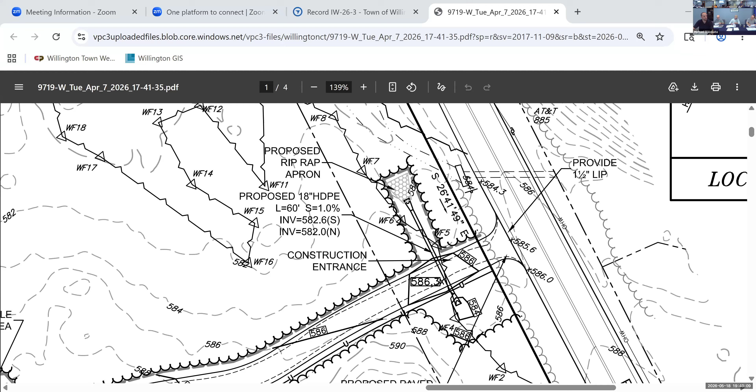Anyway, so Eric's here, he can explain to you. We have the plans up. I was there and Evan as well, so I have a good idea what's going on here. I was out there this morning. Well, I drove almost all the way back. Get the back all the way up? What's that? Get the back all the way up? No. Okay, good. Right, so it's okay, it's fine.

So I was retained by Ryan White because he wants to build a house on this 58-acre parcel. He wants the house set back from the road so he has privacy. This property is abutted to the east by Ruby Road and to the west by I-84. And it's a little bit south of the town bus parking lot, which is across the street on Ruby Road.

The wetlands were delineated by Rick Zulik, certified soil scientist, last September. We're proposing to access the new house. On the plan, the house is all the way on the left, the west side, with an 800-foot long driveway to get from Ruby Road up to the new house site. Right in front of the house is the proposed septic system, and the well is a little bit to the south of the house.

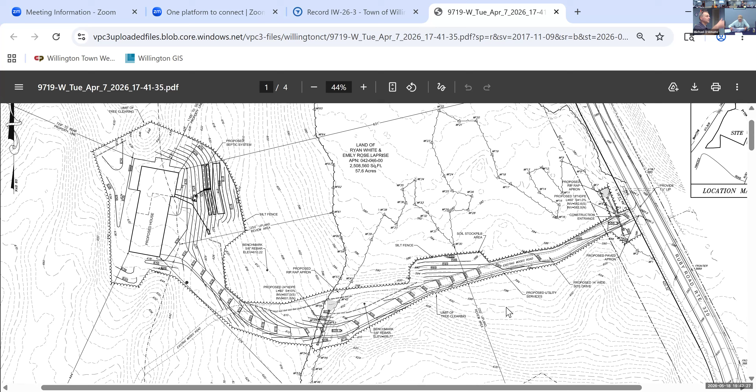There's an existing woods road that you must have driven up. Yes, that goes up almost to the house site and beyond, all the way to the back of the property. But we're going to follow that woods road for about 350 feet before we veer off to the south and then back up to the house site. The reason for that is we need to get this driveway higher sooner, or else it'll be too steep to meet town standards for a driveway. The proposed driveway is not to be paved, so it's got to be under 10%. So by swinging the driveway to the south at about the 350-foot mark, and crossing the wetland where we're showing it, we're getting the driveway up while keeping it under 10%.

And what we're doing is reducing the amount of fill that's needed by essentially climbing the hill sooner. So we're proposing 2 crossings. Mike's got us zoomed into the second one, so I'll just talk about that one first.

We're proposing to cross that with a 24-inch plastic culvert. That wetland is an intermittent water course that was delineated by Mr. Zulik. The crossing is about 55 feet south of where the Woods Road crosses the wetland, even though you can hardly tell it's there when it's dry out.

What I really like about this location is when we put this pipe in, it's going to discharge onto a riprap level spreader at a location that's relatively flat compared to the rest of the water course. So we're going to be reducing velocities coming out of that pipe, and therefore reducing any likelihood of scour and erosion downhill of that. I think it's a really good location for that crossing.

As far as the other crossing goes, it's right off Ruby Road. There's a wet area there that Rick Zulik estimated was created by excavation, a very historic excavation, maybe when they widened the road or something. He noted some springs and seeps in that area, so it is wet at times. We're crossing that wetland with an 18-inch plastic culvert as well, similar with the stone riprap at the end, to reduce velocities coming out of that pipe.

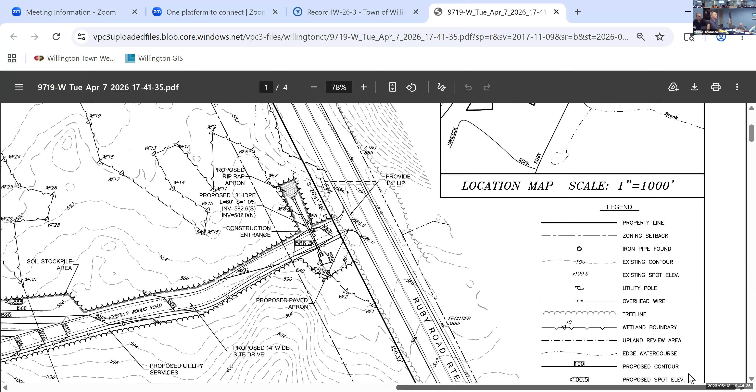Other activities within the upland review areas are the installation of underground utilities, which are just parallel to the driveway. In this case, the upland review area is 250 feet based on the existing ground slope, so the septic system is within the upland review area and a small portion of the house. You can see on the map, the septic system is probably 200 feet away from the wetlands, and the house is probably about 230 or 220 feet away. So pretty good distance there.

We're running erosion sediment control barriers, silt fence, down gradient of all of our construction activities. We have designated stockpile areas shown on the plans and an anti-tracking pad at the curb cut, and seeding schedules to stabilize the site once construction is done.

Lastly, I just want to mention that in Mr. Zulik's report, he concludes that the 2 crossings are the best option to access the house site. The plan includes the proper erosion and sediment controls, and he does not foresee any long-term or short-term negative impacts to the wetlands at all. So with that, I'll just answer any questions you guys have.

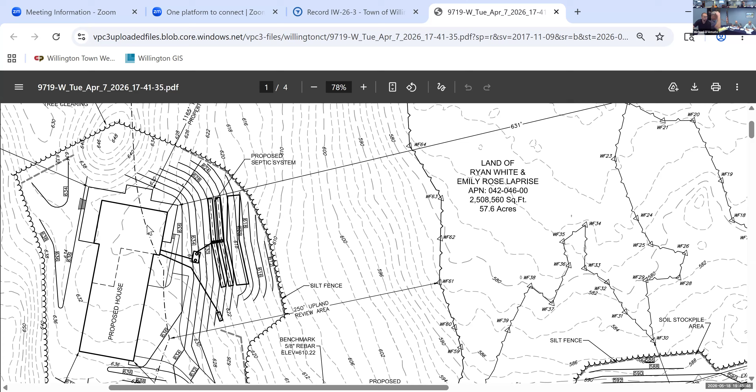The soil stockpile area, especially here, what's going to happen to that soil? Is it going to get reworked into that grade, or?

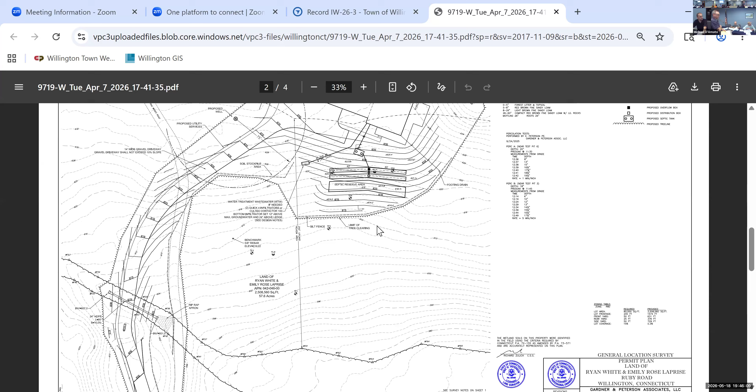So we're bringing in fill for that area right there that you were pointing at. Yeah, stockpile area, probably shown on sheet 2. Nonetheless, we could be stockpiling topsoil there and then leaving it until we need it again, or seeding it. But most likely, when we bring in fill for that portion of the site, we'll stockpile it right there, make sure it's uphill of the erosion sediment control barriers, and use it as we need it.

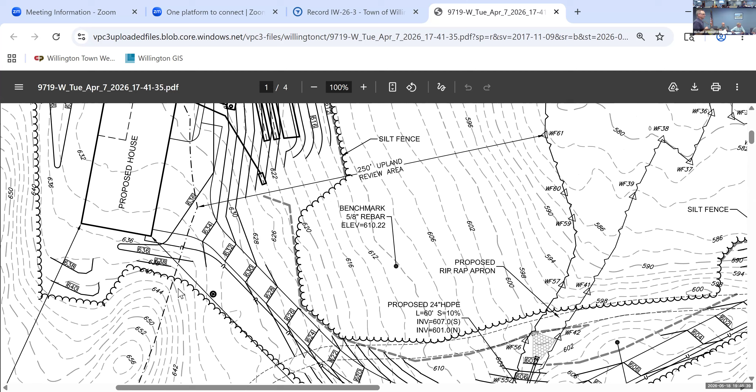And then there's another one on the other side of the crossing too, kind of the same elevation of the septic system. Right, yep, right in that 626 area. So they'll strip the topsoil for the septic and bring in sand and whatnot for that.

Yeah, I was just, cause that's so close, that first one we were looking at, I mean, it's right to the tongue of that wetland there. So, I see what you're saying. Yeah, so maybe in that area.

I know you're gonna have silt fence, but maybe just bump up your BMPs a little bit, maybe some wattle or hay bales. We could even slide it a little bit to the east instead of having it right there, where it's nice and flat. That might be a better option.

And then you're further away from that point on the wetland flag 30 there. Yeah, sure. You can put that in as a condition.

I have a question to ask. How familiar are you with the drainage of 320 south of this site, particularly on this curve here?

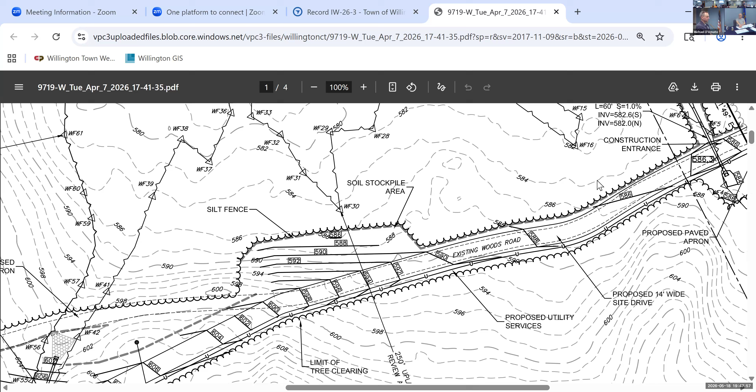The DOT pushes a lot of stormwater off the road at the toe of slope, and it's going to travel down and cross that driveway. I'm questioning whether or not using an 18-inch pipe is going to be adequate in extreme situations.

So in looking at the topography out there along Ruby Road and onto our site, I remember figuring out the watershed to that culvert. And I was actually a little surprised how at times the water does get onto Ruby Road and then gets back off and onto our site, just like you're talking about. So we designed that culvert for a 25-year storm to get water, which includes portions of Ruby Road, over to there, and obviously the forested area on our site and a little bit to the south of it.

So is this area here, Eric, in your watershed? Yep, absolutely. Yeah, I mean it comes out like this. All this is in the watershed.

Yeah, because they've had a continual problem down through here, the erosion along. It certainly seems like the water does run right down that edge of that road. Yeah, but it also gets diverted onto the property, and where it goes from there, it's not going down the side of the road. There is some that goes down the side, but a lot of it's gonna cross the driveway. We have accounted for that. That was one of my concerns. It was a little surprising to me that was gonna be the case, but yeah.

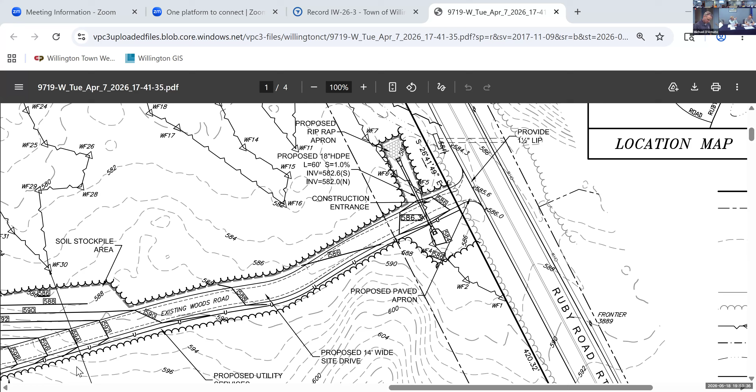All right, so I'll make a motion to accept, approve inland wetlands application IW 26-3, request to construct driveway, utilities and culverts associated with construction of a single family home at 0 Ruby Road, map block lot 42, 4600, owner R. White, applicant E. Peterson, with the condition that they're gonna move that eastern stockpile further to the east.

Between those two wetlands, be further from wetland flag 30. Yeah, between 30 and 16. Gotcha, 16. Yeah, right, like that, so just move it to the east.

Anything else, Sean? Are you okay with that? Yes.

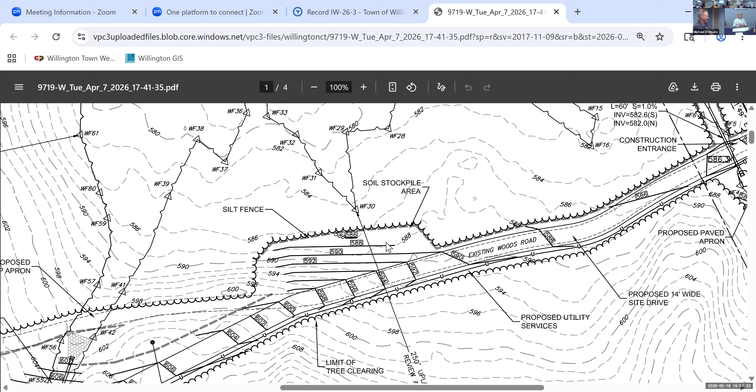Oh, I'm sorry, you guys vote? Good luck. Oh, did we vote? I made a motion. Did I miss it? Yeah, he's got a second. All in favor? Aye. Any further discussion? Okay, thanks a lot. Thank you.

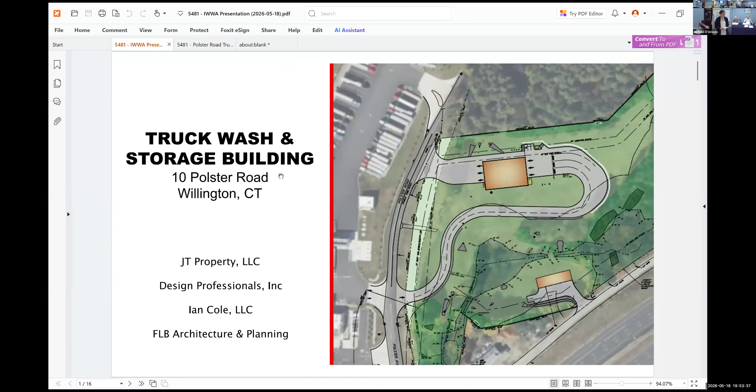For the record, my name is Lauren Mello, I'm a professional engineer in the state of Connecticut with Design Professionals, Inc. With me tonight is Casey Cousins, EIT and DPI's project engineer, and Ian Cole, registered wetland scientist and professional soil scientist in the state of Connecticut with Ian Cole LLC.

We are pleased to present this application for your consideration. We are here representing JT Property LLC, and this project requires IWWA approval because portions of the work are located within the 100-foot regulated upland review area of the wetlands.

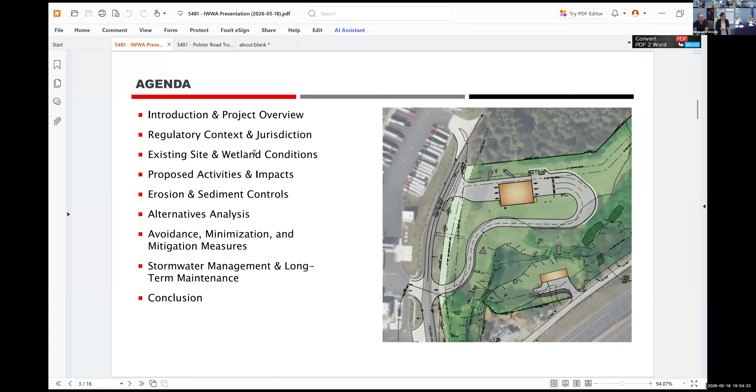The town of Willington regulates inland wetlands and watercourses under their own regulations, adopted and effective September 2009. These local regulations implement the Connecticut Inland Wetlands and Watercourses Act, found in Connecticut General Statutes sections 22A, 36 through 45. We have prepared this application in full compliance with the town's submission requirements.

The package includes a complete set of site and erosion and sediment control plans prepared by DPI and wetland delineation reports prepared by Ian Cole as required by the regulations. The project also conforms to the town of Willington's planning and zoning requirements, the Connecticut DEEP Soil Erosion Sediment Control Guidelines, and the 2024 Connecticut Stormwater Quality Design Manual.

On May 11th, we received technical comments from Nathan L. Jacobson and Associates, the town's engineering consultant. The comments primarily focus on the stormwater management system and required some clarifications and minor adjustments. There were also a few site-specific comments regarding vehicular maneuvering, safety, and signage on site.

We submitted a formal response to comments letter on May 13th that directly addresses or clarifies each item. While we defended certain aspects of the stormwater design that were intentionally configured, we have committed to incorporating the majority of Jacobson's recommendations into the final plans.

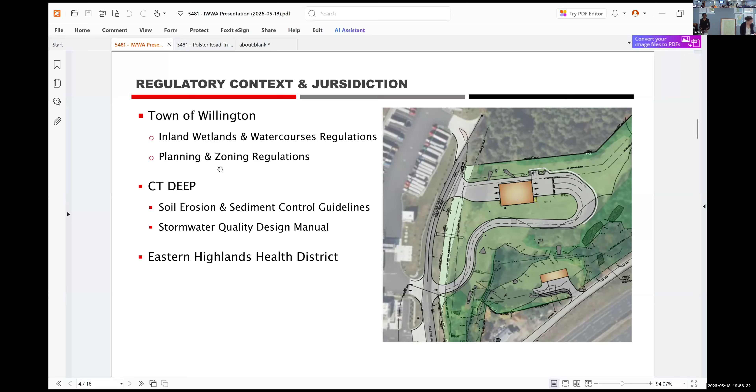The subject property is a 12.3 acre lot. It's currently a vacant and undeveloped parcel located within the designated commercial zone. Just to note, the site received a zone change approval from Planning and Zoning on December 2nd, 2025.

The site is accessed from Polster Road on the western boundary and Mahaliak on the southern boundary. The site was formerly farmland and currently features large boulder piles, a gravel drive, several stone walls, and 2 man-made ponds. When we were out on the site, walking with Commissioner Toulis last Monday.

The property consists of 2 main open fields, a larger one to the north, approximately 5 acres, and a smaller one to the south that's approximately 1 acre. They're both predominantly covered by dense upland grass and connected by a narrow grass strip between the 2 wetland areas.

The edges of the clearings transition into wooded areas that extend to the property lines. So on the screen, all that green hashed area, that's all wetlands on site.

Overall, the property drains from the northeast to the southwest corner. It is located in the Roaring Brook Subregional Drainage Basin, and a narrow farm drainage way runs between the 2 fields and connects the 2 man-made ponds. That's this line right here.

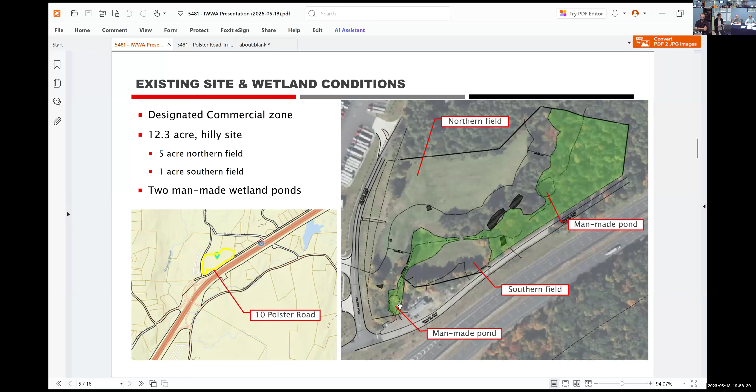Good evening, for the record, my name is Ian Cole, professional soil scientist, professional wetland scientist, based out of Middletown, Connecticut. I delineated the wetlands on this site in December 2024, about a year and a half ago now.

Then I followed up once the project had a design done. I went back out this spring to rewalk the site and do basically a wetland function and value assessment and wetland impact assessment. I wrote a report that should be in the record dated April 19th, or maybe even earlier, it's escaping me at the moment.

Generally speaking, I think the important things to highlight: the site's not in a natural diversity database area, there's no FEMA 100-year floodplain mapped on the site, and the site's not in an aquifer protection area. Generally speaking, as we heard, there's a 5-acre field in the northern section that would be kind of the centralized point of development for the truck wash.

In the southern area, there's a 1-acre field that would host the small storage unit building, and the balance of the site is wooded. The site drains from the northeast corner to the southwest corner. In the wetland corridor, there are 2 old man-made relic farm ponds. Those little black dots on the side are stone piles from when they tilled the field every year and threw stones off to the corner.

I think the other thing to highlight is that this application can be constructed with no direct wetland impact. There is about 2.18 acres of impact in the upland review area. Most of that impact, though, there's not going to be a big habitat change. It's not forested, so you will see a habitat change from open field to commercial development.

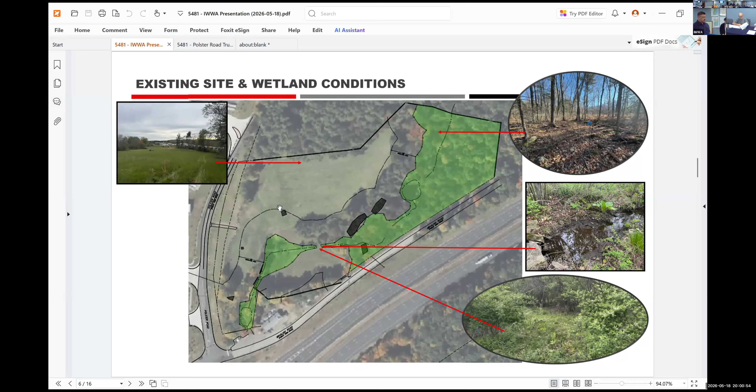Generally speaking, the grade changes are not really significant on this site. We'll hear some more details, but there's an excess of basically 11,000 cubic yards of material. The other things important to highlight are that this application includes a lighting plan, a robust sedimentation erosion control plan, both a traditional stormwater plan and a specific closed loop system for all wastewater treatment, and a robust landscaping plan introducing 73 new shrub and tree species planted throughout the site as part of the stabilization. Overall, there's not anticipated to be any change in the function and value of the wetlands, considering there's no direct wetland impact.

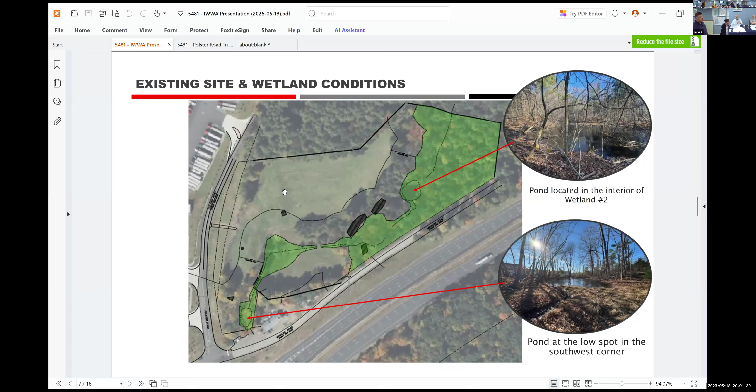I'll turn it back over to the engineers, and I'll be available to answer any questions if the commissioner has any.

For proposed activities, site improvements include the commercial truck wash facility and a 5-unit storage building. The 10,000 square foot truck wash building is located on the larger clearing near the northern property line. It features 3 bays: 2 are automatic washers with a 15 to 20 minute cycle, and the third is a 60-minute hand washing cycle bay.

A paved meandering driveway, which you can see in gray, includes an 18-foot wide queuing lane and a 12-foot wide bypass or slip lane leading up to the truck wash. The facility and site are designed for unidirectional traffic flow, with an entrance on Polster Road and an exit further to the north.

One small waiting area, an office, a single stall bathroom, and a mechanical space is proposed within the facility besides the washing bays. In terms of wash water management from the building's operation, a controlled truck wash water recycle system will be employed to treat and recycle wastewater. Inside the truck wash, floor drains will divert wastewater to the controlled recycle system, which reclaims, retreats, and recycles the wash water, conserving water and reducing or eliminating contaminated discharge.

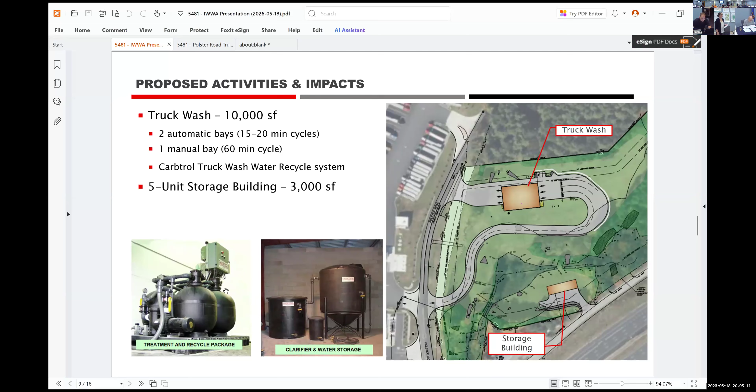For the 3,000 square foot storage building on the south, it's accessed exclusively from Mahaliak by a paved driveway apron, a bituminous driveway, and a 2-space parking area also associated with the building. It'll be serviced by overhead electric from a Mahaliak pole, and a stormwater sedimentation swale and water quality basin, which you'll hear more about later, are proposed to manage stormwater in this area. The 2 pictures here are part of the Carbtrol interior system for the truck wash, which is part of their treatment package.

As Ian mentioned, the project includes a thoughtful landscape plan that's designed to stabilize the site, enhance and screen visual appearance, and strengthen the natural buffer adjacent to the wetlands. We're proposing a combination of native and adaptive plant materials that are beneficial to wildlife, including trees like red blaze maple, arborvitae, eastern red cedar, white spruce, and pin oak.

The evergreen trees are placed along the road right outside a sight line easement buffer. You can see it right here. This gray hatch is the sight line that you can't put trees in, and then there are the evergreen plantings.

In addition, we're using specialized seed mixes across the site. There's a conservation wildlife mix for erosion control and disturbed slopes, basin side slopes, and no-mow areas. And there's also a wetland seed mix for the detention basin and water quality basin bottoms that contains native seeds suitable for areas with moist ground.

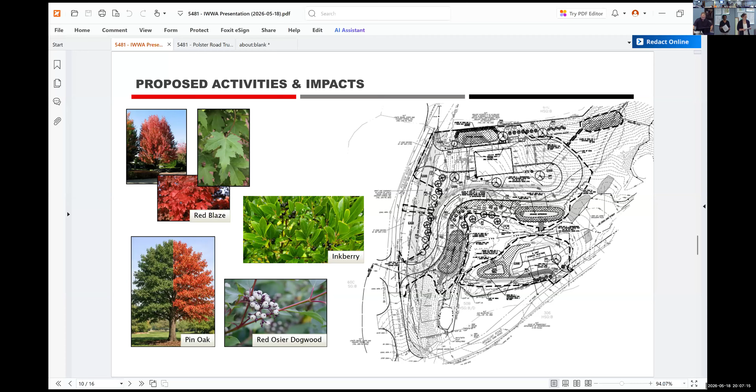The total proposed area of disturbance for the project is approximately 4.3 acres. This includes all clearing, grading, and construction of impervious surfaces. Importantly, there is no direct disturbance to any delineated inland, wetland, or watercourse. All work will avoid the flagged wetland boundaries and the two man-made ponds located within them, as Ian mentioned.

As also Ian mentioned, the project does propose work within the upland review area, with approximately 2.18 acres of disturbance in that regulated zone. Proposed regulated activities within that area primarily consist of selective clearing and grading, construction of driveways, retaining walls, and stormwater management features, and installation of erosion controls and the landscape plantings.

The entire site, including the truck wash and the storage facility, expects an approximate 11,000 cubic yard cut or excess of material. Any imported material that comes into the site will be primarily for roadway and structural basis for the site improvements, and all materials are expected to meet Connecticut DOT or water quality standards and guidelines.

All grading and construction activities have been designed to minimize encroachment into the regulated review areas to the maximum extent possible. The plans show the proposed limit of work clearly delineated, with generous setbacks maintained from the wetland boundaries wherever we could. The areas that we're tightest in are by one detention pond here and one water quality pond here, where naturally the discharges from the sites come from.

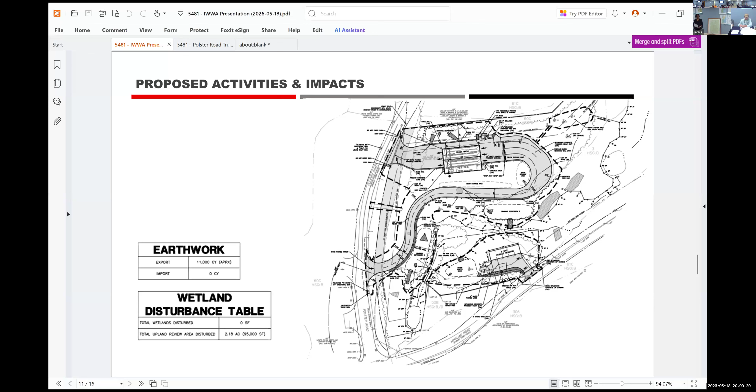Moving into erosion and sediment control, the project includes a comprehensive erosion sediment control plan that was prepared in accordance with the 2024 Connecticut guidelines for soil erosion and sediment control and the town of Willington requirements. During construction, erosion control practices such as temporary sediment traps and diversion swales, inlet protection to all stormwater inlets, catch basins and drainage structures, construction entrances, stockpiling with proper protection, and installation of double barrier protection will be utilized.

The double barrier protection will be silt fence, hay bales, or straw bales backed by silt fence, and those are always in the area between construction and the sensitive resources. So really all these dark lines are double barrier protection, and in some cases we have triple.

Once grading is complete in any area, temporary or permanent stabilization measures will be applied immediately, including seeding with a specified erosion control seed mix or erosion control blankets on slopes, and mulching. Blankets will be applied to anything 3 to 1 or greater, and in water quality areas. These controls are designed to prevent sediment from leaving the site and to protect environmentally sensitive areas.

The plan also includes regular inspection and maintenance requirements during construction, which is in line with the Connecticut DEEP General Permit, even though the site does not trigger that permit because it's less than 5 acres of disturbance. For example, the contractor will be required to maintain erosion and sediment control measures during construction with weekly inspections and immediate repairs. This proactive approach, combined with the fact that there are no direct wetland impacts, will ensure the project causes minimal temporary disturbance to these regulated resources.

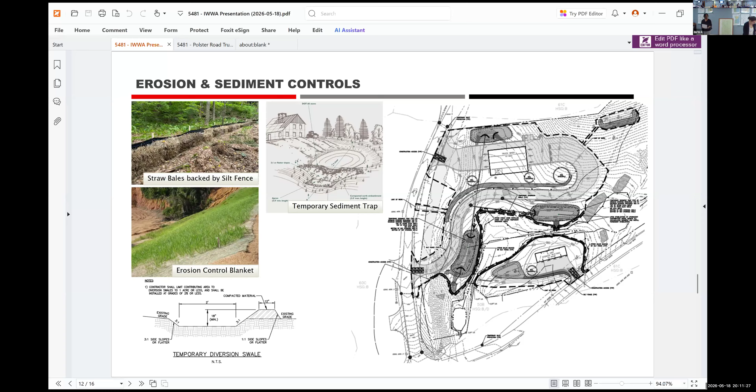I'd like to now walk you through some alternatives that we considered during the design process. This analysis was performed to ensure that we arrived at a layout that was both practical for the site's intended use, and also to minimize the impacts on the wetlands and regulated resources.

Early in the conceptual phase, the storage building was not part of the original proposal. During the zone change process in December of 2025, planning and zoning encouraged the inclusion of an additional revenue-generating use to support the town's economic development goals and help ease the residential tax burden. In response, the applicant added a 5-unit storage building, and we carefully evaluated its placement to keep it as far away from the wetlands as feasible, while still allowing functional access from Mahaliak for adequate maneuvering space.

For the truck wash building, we evaluated several possible locations on the northern clearing. A long, functional queuing lane—that's the meandering driveway—is essential for this type of operation to prevent trucks from backing up onto Polster Road. After considering different configurations, we determined that the current location provides the best balance of building placement, long queuing capacity, and safe truck circulation. For example, we looked at locating the building more centrally on site.

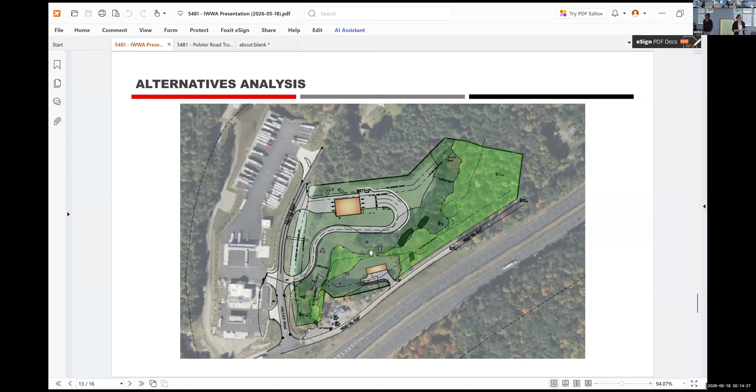In summary, after thoroughly reviewing these alternatives, the current site plan represents the most functional and effective layout for the site. It successfully meets the operational needs of the truck wash and storage facility while achieving the greatest avoidance of regulated resources and the least overall environmental impact.

With the proposed layout in mind, the project has been carefully designed with the following regulatory preference: avoidance first, minimization second, and mitigation where necessary. For avoidance, there are no direct impacts to the wetlands, water courses, and remaining ponds, and all proposed structures, pavement, and grading stay completely outside those flagged wetland boundaries. Second, for minimization, we limited the disturbance within the 100-foot upland review area as much as possible.

Again, it's only 2.18 acres. Buildings and impervious surfaces have been positioned to maximize the distance from the wetland edges while still allowing safe and functional truck operations.

In summary, this project strictly follows the avoidance, minimization, mitigation sequence. We believe the proposed design represents a responsible balance between the needs for economic development while providing strong long-term protection of Willington's wetland resources.

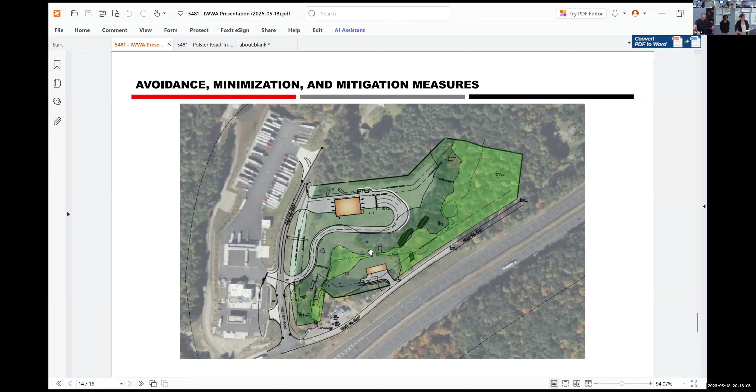Next, Casey Cousins will speak about the stormwater, site water, and long-term maintenance of the system.

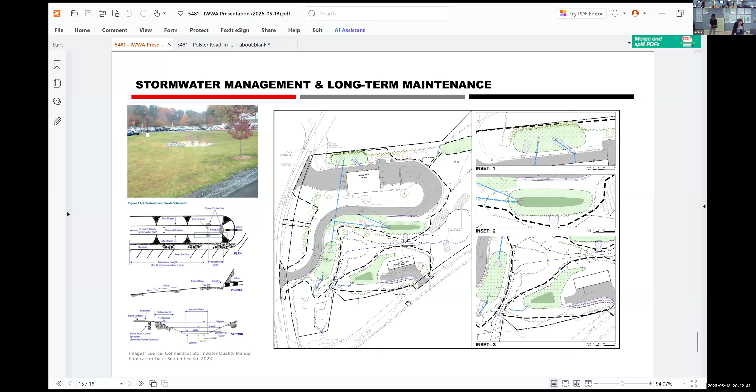In closing, this project represents a well-planned, responsible commercial development on a long vacant parcel in the design commercial zone. After careful design and thorough environmental review, the proposal achieves zero direct impacts to any inland wetlands or watercourses on the site. Disturbance within the 100-foot upland review area has been minimized to approximately 2.18 acres.

The project incorporates industry-leading protection measures, including a robust stormwater management system with water quality treatment, a partial wastewater recycling system that captures and recycles 80 to 95% of truck wash water, comprehensive erosion and sedimentation controls, and native landscaping designed to strengthen buffers and enhance habitat value.

We've carefully considered the alternatives and selected the current design because it best balances operational function with the least possible impact to the regulated resources.

The project fully complies with the Willington Inland Wetlands and Watercourses regulations and the Connecticut Inland Wetlands and Watercourses Act. This development will bring positive economic benefits to the town through new tax revenue while demonstrating strong environmental stewardship.

We are confident that the proposed project will not harm, and in many ways will help protect, the valuable wetland functions on this property. We respectfully request that the Willington Inland Wetlands and Watercourses Agency approve this application.

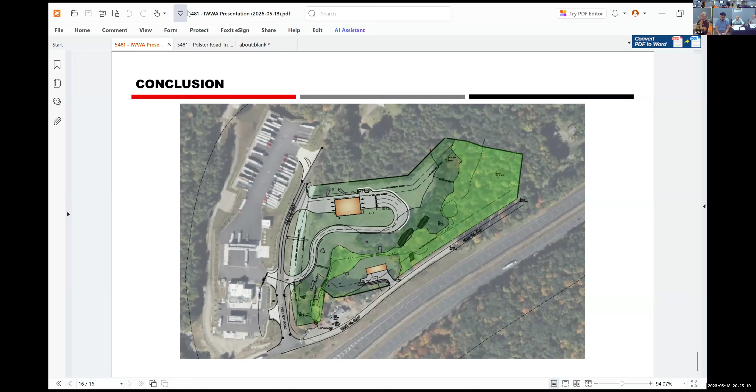Well, this right here? No, right there, where my cursor is. Yeah, right there. Can you pull up the site plans? He's on sheet DR1, or SP1. It's all the same, just inside. Let me zoom in. That little tongue there. Right there.

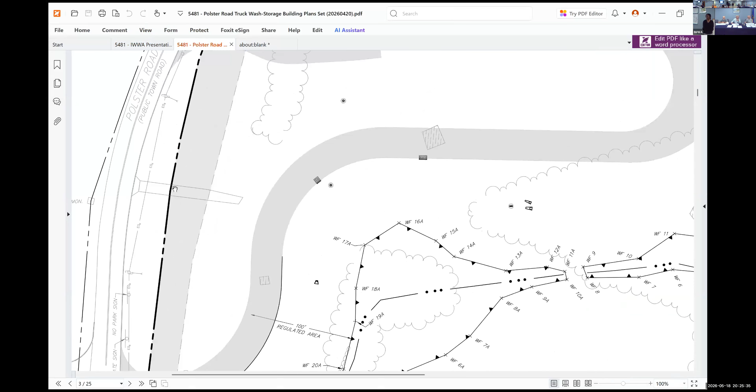No, that's just outlined because it's that gravel drive, and it's included in the limit of disturbance. That's the limit of work, and that's being pulled out and replaced with lawn or seed or whatever's going on. So that's going away.

It's existing, it's just that there's nothing on the plans that describes what that is. We can add something to the site plan — it's shown on the demolition plan, on the site plan, to be removed. Secondly, when we were on site, we were talking about this storage building.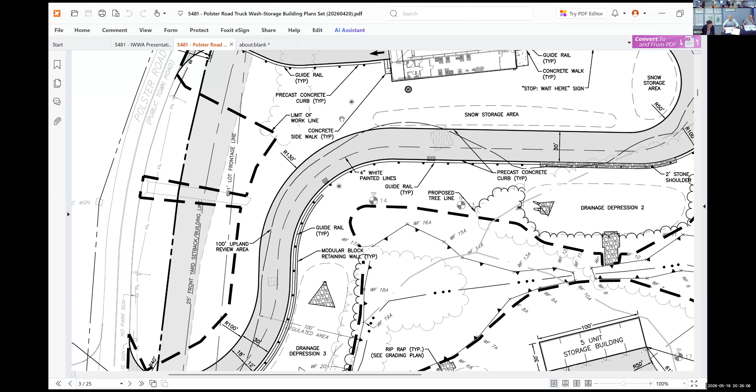That's a dry building. I don't know how this is going to be marketed — this is more of a planning and zoning issue, I suppose, than a direct wetlands issue, except for the fact there's no septic associated with that space.

Correct, that's not the intent. I just question the wisdom of that with respect to marketability, that's all. I think it would be wise to anticipate that, and that's coming out again from the wetlands perspective, being that it's septic in there.

You'll be back in front of us. My other issues will come up, I'm sure, in the planning and zoning public hearing.

I mean, overall it's interesting how you're shoehorning this whole thing into this property, given the terrain and the constraints. Now, it's going to be manned?

I'm sorry, you say it again? It's going to have personnel on site at all times? Yes, it's not 100% automatic — there'll be two staff members on site at all times for the truck wash.

Is it 24 hours, 24/7, 365? That's the plan.

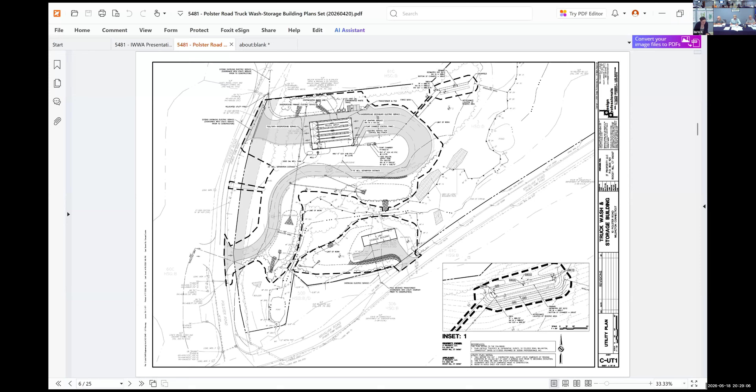Mark asked about the regular removal of sediments. What is regular? It'll be daily - you're talking about the truck wash, right? Correct, I'll show you what those tanks look like too. It'll be a daily operation. We designed it so that if there's an issue on site and the truck had to miss a day, they'll be fine. They won't overflow, they won't have to stop operations, they can keep moving and doing and washing trucks.

So there are two contaminated waste tanks there, and by our projections, put this down - you can see there's two 4,500 gallon tanks.

On the low end, we're expecting - and this is assuming it's at full capacity, scanning the number of trucks we expect every day - it has a 200 gallon wash total volume for each wash, and we get only 5% excess water for each wash. So only 1,400 gallons of those tanks would be used - out of 9,000, only 1,400 would be used.

At the highest capacity, with as many trucks as we expect, there's 250 gallons per wash, maybe not being as efficient and needing to be cleaned or something. There's only 80% efficiency of recycle, so about 20% has to be disposed of - that's 5,600 gallons per day, so it would fill up one tank plus a little bit more. That's why we did the 2 redundant tanks, so something can go down and it can continue operations without worrying too much about it.

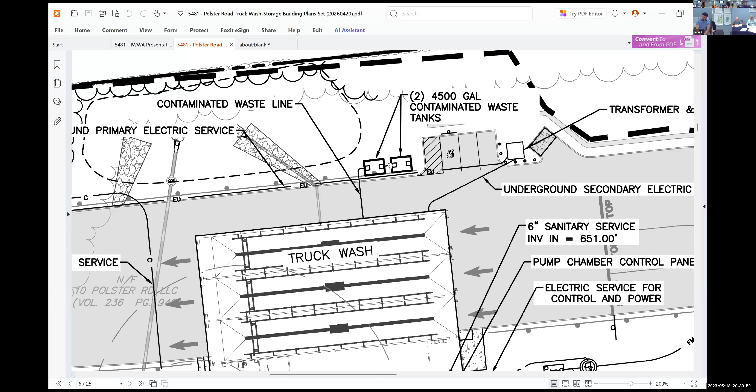Any further discussion?

I'll just note that you have the whole litany of it - there was an initial comment memo that Joe Dillon prepared, provided it to the applicant who prepared a response to comments, and then Joe sent over, an hour or two ago, a follow-up. That has to be addressed still, the follow-up. So in the applicant's response to comments, they agreed to make certain revisions, and then - I think Joe's, actually I have...

In his email he said this is simply an assessment of their response to comments. Ultimately, we'd like the chance to review the revised drawings and report. So there's not necessarily - maybe there's value in going through everything to make sure everybody's on the same page, but it's sort of common that applications include a condition that revisions be made as required by town engineer comments.

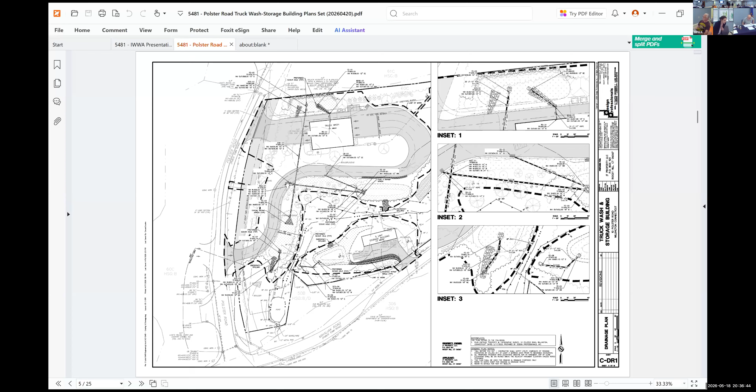And then when you come into the site, this is dropping down, so this roadway is draining all of this catch basin here. So you have this basin to the north, having sediment filtering out up here. Let me zoom in a little bit, I know it's a little glitchy. Thank you, need a bigger cursor on there. I know, I don't know how to do that.

We were getting the laser pointer out, but Mike wasn't going to chase it around. That's right, so I can't tell myself this late at night.

So this one right here essentially acts as a sediment forebay in some sense. It's piped, it's piped down. This is getting sheet flow off from where the trucks are - yep, this is getting sheet flow from the trucks. There's some paved leak-offs right here, right here. It's getting the roof discharge to here, and then it drains out of this culvert end and comes south to the hydrodynamic separator, which is the secondary treatment in this train, and that takes more sediment out, more oils out before it's discharged to D3.

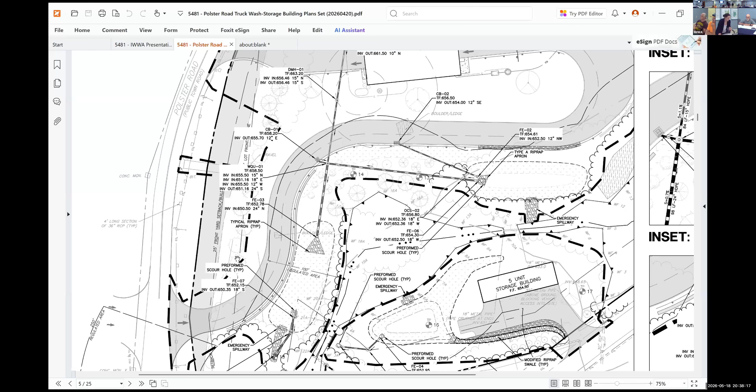I'll get back to D3 in a second. D2 over here picks up anything in this area that's coming down, anything from this slope in here, and it cleans it the same way and goes to the hydrodynamic separator again. The only area that doesn't go to a pond and the separator is this area up in here, and this is lawn or seed mix with landscaping, a little bit of driveway, and it goes to this catch basin. But it does drain into the hydrodynamic separator, which cleans everything out before discharging to D3. Then there's a long residence time in D3 where it comes out of that culvert end, goes down, comes out, and finally hits that riprap apron.

So that's why we pushed back a little on the comments. We felt there were at least two, in most cases two treatments before that basin. We didn't feel a sediment forebay was needed for each area. Yeah, it seems like a pretty robust treatment train. Yes.

And then just for the storage facility too, this right here is a water quality swale, essentially for sedimentation, that they can clean out pretty easily before it hits the water quality basin, which infiltrates and again will drain through a pipe and then go to a stilling basin that can be easily cleaned out before discharging to the wetlands over here. So that also has two areas for sediment to settle before it leaves the system.

So, conditions - I have a question I'd like to ask, if you don't mind. Given that we don't use sand on the roads in the wintertime anymore, we have to use de-icing chemicals, which are all soluble in water. And you recycle the water - how do you get out the dissolved components of de-icing chemicals? Or does that gradually build up over the course of the winter?

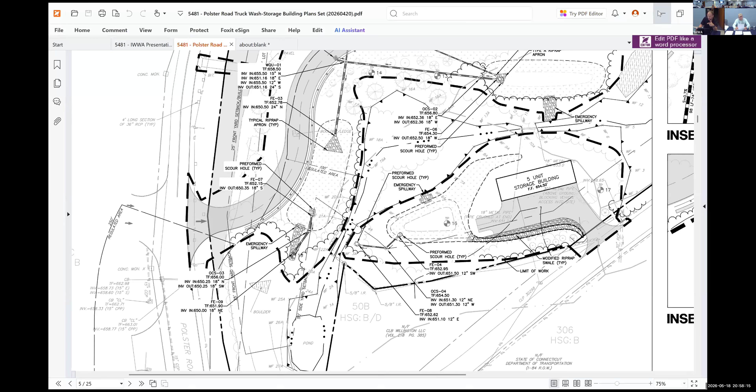Then these are sort of project specific. So the plans shall be modified to 1, incorporate a copy of the approval, that's standard. Number 2, I tweaked it slightly, but to incorporate all necessary revisions pursuant to the 5/13/2026 response to comments letter. So in their response, they agree to make certain amendments. I then left 2 spaces if there's things that you want to add.

It essentially says, based on the amount determined, what the form of the bond, whether it be in cash, check, or passbook or whatever. So if it's something small, we won't accept like an insurance bond or whatever, because if you have an E&S issue, it'll take you 3 months to get the money out of the bank.

The engineer of record shall provide certification that all temporary erosion and sedimentation controls to be utilized during construction have been installed in accordance with the approved plans and construction sequence prior to commencement of construction. Prior to the release of the erosion and sedimentation control bond, the engineer of record shall certify that all on-site drainage structures have been installed in conformance with the approved plans.

An operation and maintenance plan or narrative, so I just added this in, shall be provided prior to the commencement of site activity. So it doesn't necessarily need to be a plan, like a sheet, but I think having a document that explains the operation and maintenance responsibilities and what will happen. We talked about certain intervals. I think that will help bring some clarity to how this is all going to function.